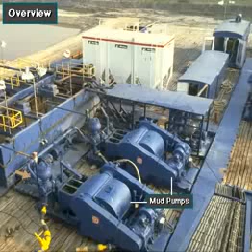Powerful mud pumps pick up mud from the suction tank and circulate the mud downhole, out the bit, and back to the surface.

Although rigs usually have 2 mud pumps, and sometimes 3 or 4, normally they use only one at a time. The others are mainly used as backup in case one fails.

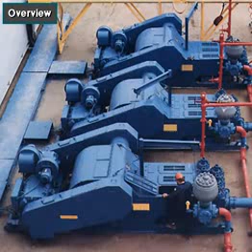Sometimes, however, the rig crew may compound the pumps. That is, they may use 2, 3, or 4 pumps at the same time to move large volumes of mud when required.

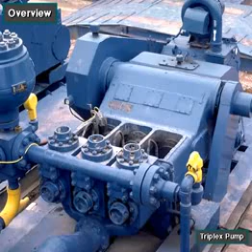Rigs use one of 2 types of mud pumps: triplex pumps or duplex pumps. Triplex pumps have 3 pistons that move back and forth in liners. Duplex pumps have 2 pistons that move back and forth in liners.

Triplexes have many advantages. They weigh 30% less than a duplex of equal horsepower, or kilowatts. The lighter weight parts are easier to handle, and therefore easier to maintain.

The other advantages include: they cost less to operate, their fluid end is more accessible, and they discharge mud more smoothly. That is, a triplex's output doesn't surge as much as a duplex.

One of the most important advantages of triplex over duplex pumps is that they can move large volumes of mud at the higher pressures required for modern deep hole drilling. Triplex pumps are gradually phasing out duplex units.

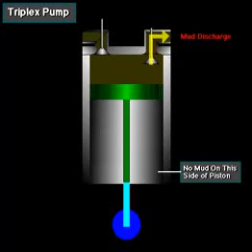In a triplex pump, the pistons discharge mud only when they move forward in the liner. Then, when they move back, they draw in mud on the same side of the piston. Because of this, they are also called single-acting.

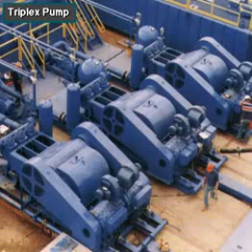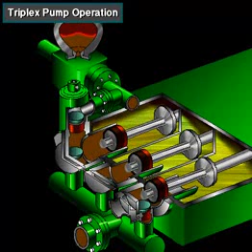Here's a schematic of a triplex pump. It has 3 pistons, each moving in its own liner. It also has 3 intake valves and 3 discharge valves, and a pulsation dampener in the discharge line.

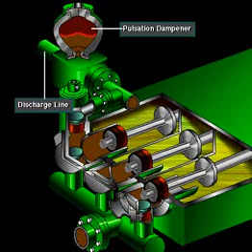Look at the piston at left. It has just completed pushing mud out of the liner and through the open discharge valve. The piston is at its maximum point of forward travel. The other 2 pistons are at other positions in their travel, also pumping mud. But right now, concentrate on the left one to understand how the pump works.

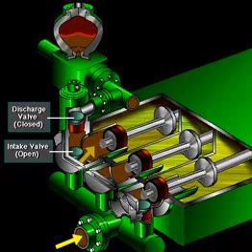The left piston has completed its backstroke, drawing in mud through the open intake valve. As the piston moved back, it lifted the intake valve off its seat and drew mud in. A strong spring holds the discharge valve closed.

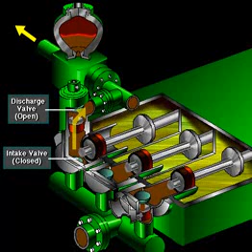The left piston has moved forward, pushing mud out through the now open discharge valve. A strong spring holds the intake valve closed. The left piston has completed its forward stroke, the full length of the liner, completely discharging the mud from it.

All three pistons work together to keep a continuous flow of mud coming into and out of the pump. Crew members can change the liners and pistons. Not only can they replace worn-out ones, but they can also install different sizes.

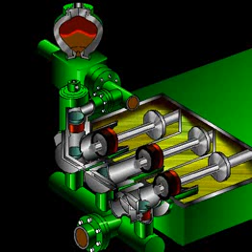Generally, they use large liners and pistons when the pump needs to move large volumes of mud at relatively low pressure. They use small liners and pistons when the pump needs to move smaller volumes of mud at relatively high pressure.

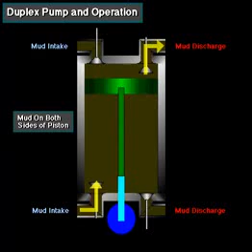In a duplex pump, the pistons discharge mud on one side of the piston and, at the same time, take in mud on the other side.

Notice the top piston and liner. As the piston moves forward, it discharges mud on one side as it draws in mud on the other. Then, as it moves back, it discharges mud on the opposite side and draws in mud on the side where it had earlier discharged it.

Duplex pumps are therefore double-acting.

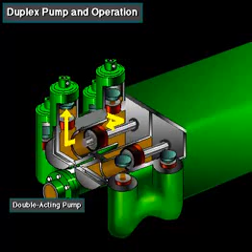Double-acting pumps move more mud on a single stroke than a triplex. However, because they are double-acting, they have a seal around the piston rod. The seal keeps them from moving as fast as a triplex.

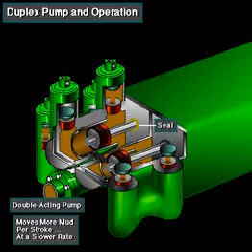Input horsepower ranges from 190 to 1,790, or from 142 to 1,335 kilowatts. The largest pump's maximum rated working pressure is about 5,000 psi, almost 35,000 kilopascals, with 6-inch, 152 millimeter liners.

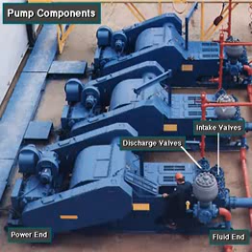A mud pump has a fluid end, power end, and intake and discharge valves. The fluid end of the pump contains the pistons with liners, which take in and discharge the fluid, or mud. The pump pistons draw in mud through the intake valves and push mud out through the discharge valves.

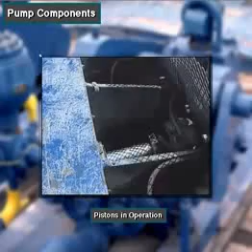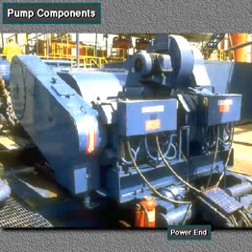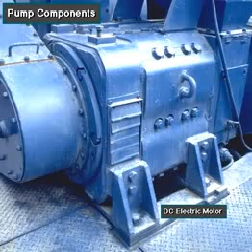The power end houses the large crankshaft and gear assembly that moves the piston assemblies in the fluid end. Pumps are powered by a pump motor. Large modern diesel-electric rigs use powerful electric motors to drive the pump. Mechanical rigs use chain drives or power bands, belts, from the rig's engines, and compound to drive the pump.

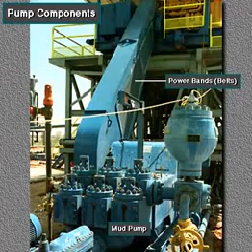A pulsation dampener connected to the mud discharge line smooths out surges created by the pistons as they discharge mud. This is a standard bladder-type dampener.

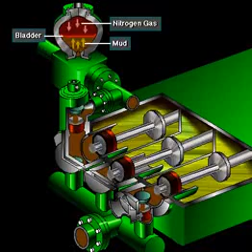The bladder in the dampener body separates pressurized nitrogen gas above from mud below. The bladder is made from synthetic rubber and is flexible. When mud discharge pressure presses against the bottom of the bladder, nitrogen pressure above the bladder resists it. This resistance smooths out the surges of mud leaving the pump.

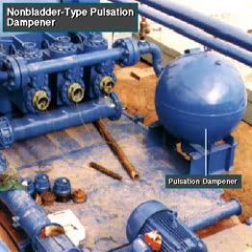Here is the latest type of pulsation dampener. It does not have a bladder. It is a sphere about 4 feet, or 1.2 meters, in diameter. It is built into the mud pump's discharge line.

The large chamber is full of mud. It has no moving parts, so it does not need maintenance. The mud in the large volume sphere absorbs the surges of mud leaving the pump.

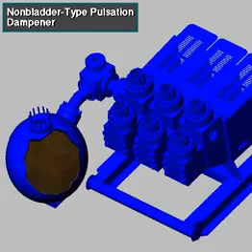A suction dampener smooths out the flow of mud coming into the pump. Crew members mount it on the triplex mud pump suction line.

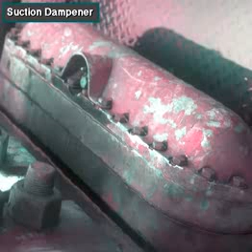Inside the steel chamber is an air-charged rubber bladder, or diaphragm. The crew charges the bladder about 10 to 15 psi, 70 to 100 kPa.

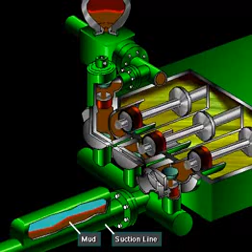The suction dampener absorbs surges in the mud pump suction line caused by the fast-moving pump pistons. The pistons constantly start and stop the mud's flow through the pump.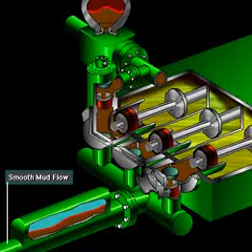At the other end of the suction line, a charging pump sends a smooth flow of mud to the pump's intake. When the smooth flow meets the surging flow, the impact is absorbed by the dampener.

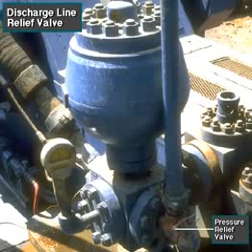Workers always install a discharge pressure relief valve. They install it on the pump's discharge side, in or near the discharge line. If for some reason too much pressure builds up in the discharge line, perhaps the drill bit or annulus gets plugged, the relief valve opens. The open valve protects the mud pump and system against damage from overpressure.

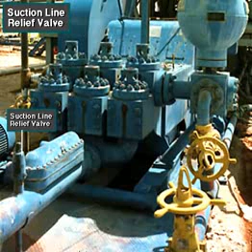Some rig owners install a suction line relief valve. They install it on top of the suction line, near the suction dampener. They mount it on top so that it won't clog up with mud when the system is shut down.

A suction relief valve protects the charging pump and the suction line dampener. A suction relief valve usually has a 2-inch or 50 mm seat opening. The installer normally adjusts it to a 70 psi or 500 kPa relieving pressure.

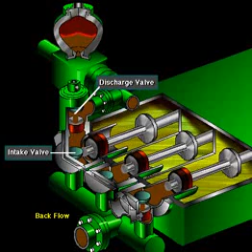If both the suction and discharge valves failed on the same side of the pump, a high backflow or a pressure surge would occur. The high backflow could damage the charging pump or the suction line dampener.

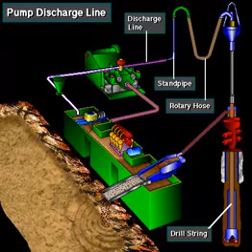The discharge line is a high-pressure line through which the pump moves mud. From the discharge line, the mud goes through the standpipe and rotary hose to the drill string equipment.